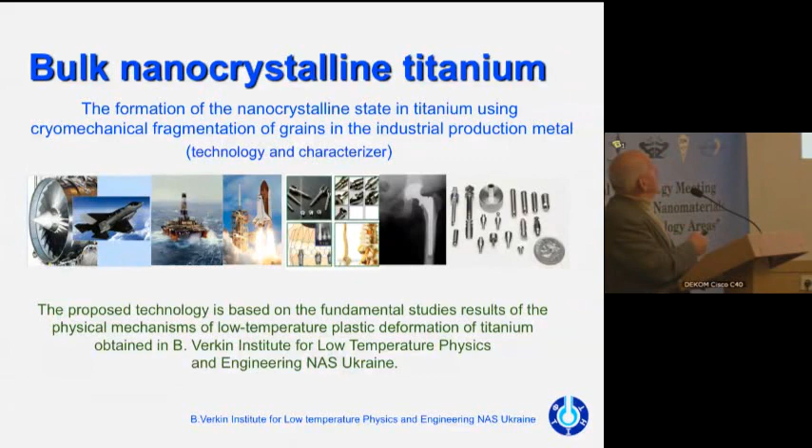The existing methods of obtaining nanocrystalline materials using plastic deformation have a number of disadvantages. I will later list the advantages of this particular method, but the technology itself is based on the results of fundamental studies of mechanisms of plastic deformation of titanium and titanium alloys, done for many years in the Physical Technical Institute of Low Temperatures named after Verkin at the National Academy of Sciences.

Down to 0.5 kelvins. The characteristics of titanium that are formed in the nanocrystalline state. The best thing here is creating the nanocrystalline state in titanium of the highest purity. Nowadays there is no method that could be applied for this type of refinement of titanium or zirconium, and 30 nanometers cannot be achieved still in the best labs over the world.

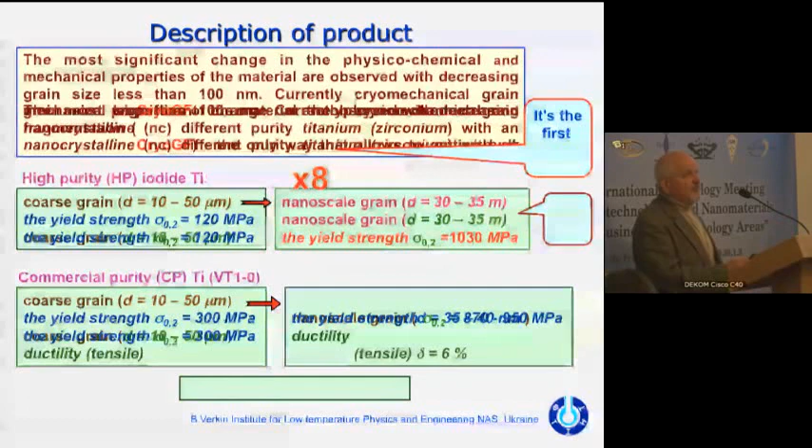But another thing, the flow threshold of titanium is increased 8-fold when the grain is reduced to 30 to 35 nanometers, from 120 megapascals to 1030 megapascals, with a ductility of 22%. For technically pure titanium, the strengthening process is additive, comprised of the additives present in the metal.

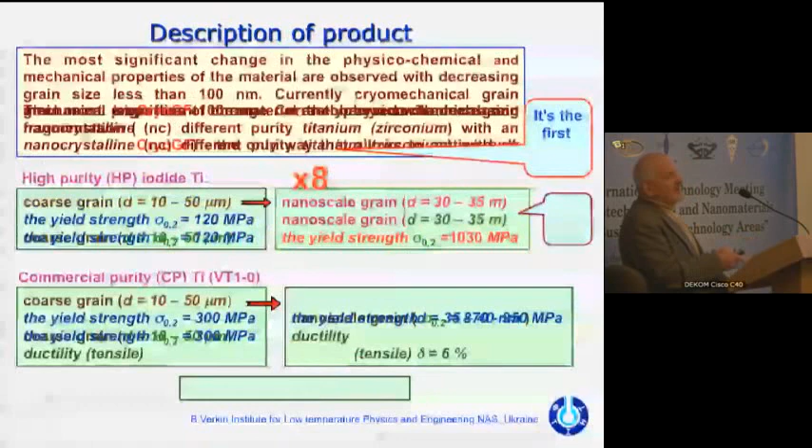What is it, nanoscale grain? To the right. The nanometers. Oh no, excuse me, this is a clear mistake here. No, yeah, my mistake. So 35 to 40 nanometers for technical titanium compared to titanium, 6 aluminium, 4 vanadium.

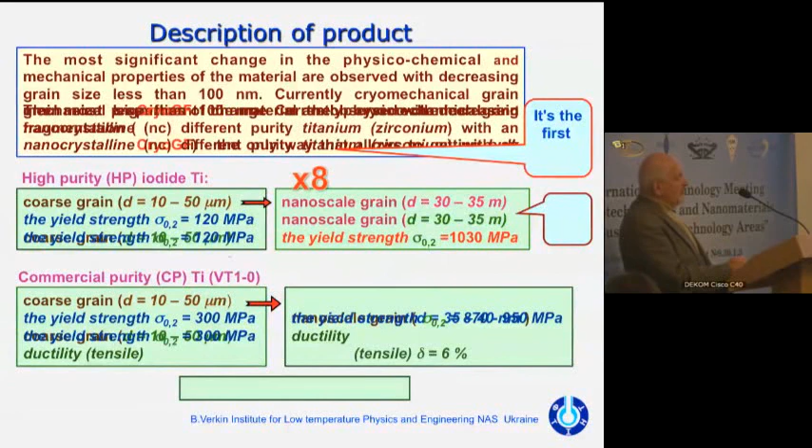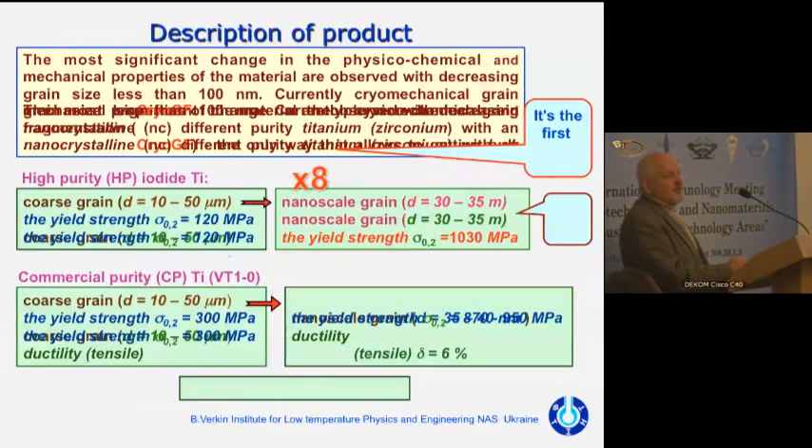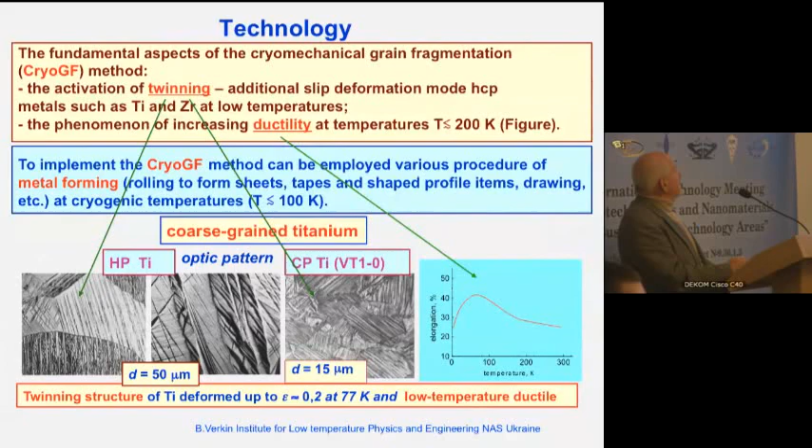The physical basis of these technologies and development. Titanium is twinning at lower temperatures. At the bottom we have optical structures for titanium, with an initial grain size of 15 microns. Every grain is fragmented by twinning. This is the very mechanism. With the increase of cryo deformation, the grain size decreases significantly. High purity titanium will have a grain size of 30 nanometers. Technical titanium has a larger grain size.

Materials used in various spheres, especially for medical implants, must have not only technical properties but functional. For technical properties, maybe 100 nanometers of grain size will suffice. But for physical chemical properties, corrosion resistance, biocompatibility, bioactivity, further refining is very important for functional properties.

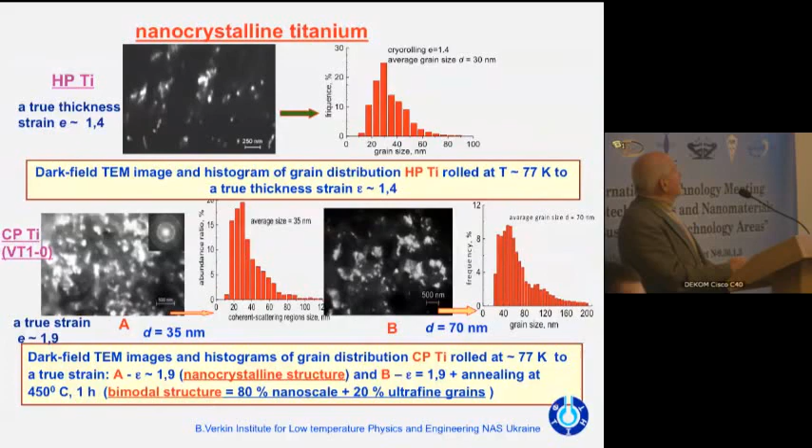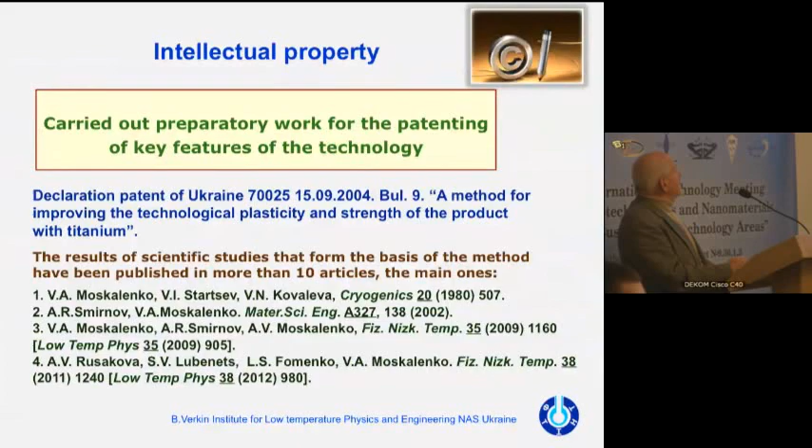But in order to break the threshold of plasticity while increasing hardness, we suggest a bimodal structure: a nanocrystalline matrix with a share of submicron size grains. We don't have the patents, there's only a declaration of patent. And these are the results and the participants in these studies.

And these are some of the advantages: the hardness, the fatigue strength, resistance to friction. Titanium has a very low friction resistance, and the studies are still ongoing. With the refining of particles, the wear resistance also changes.

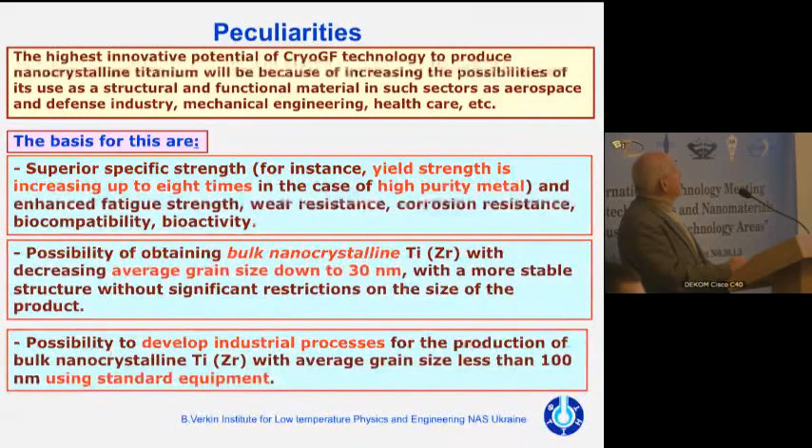Now, to conclude, the existing methods of alloy pressing only produce bigger grain sizes and smaller samples. Our technology allows applying the existing methods of metal treatment. All kinds of regularly applied metal treatment can be used. The Russian Institute in Ufa is the only organization that could produce a rod 8 meters long and 2 millimeters in diameter.

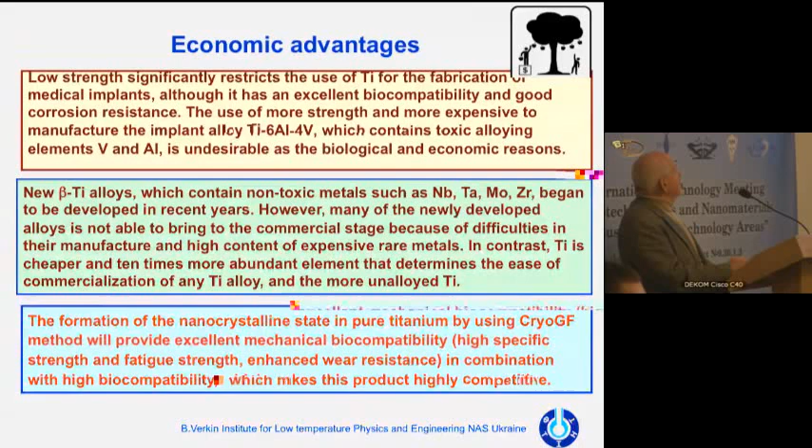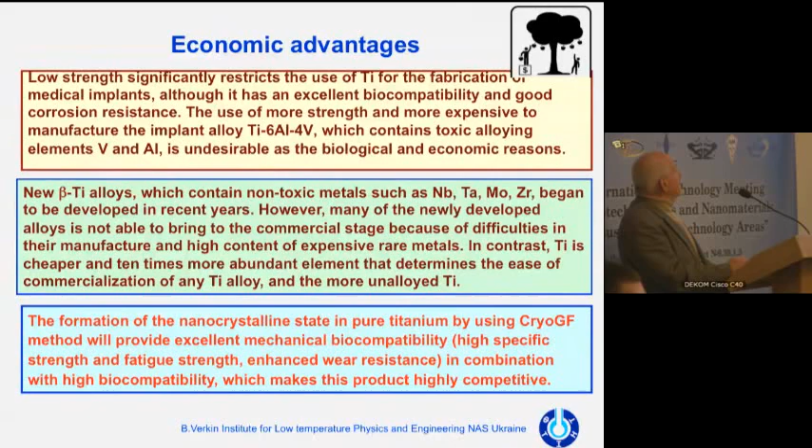Economically, it's hard to say, we don't know yet. We can only presume it is highly attractive. For investors, it is attractive because it is easily commercialized. For instance, liquid nitrogen as a coolant is easy to obtain in oxygen producing factories, and liquid nitrogen, used for cooling, can be used for making materials. The words are written here, but they offer a general overview.

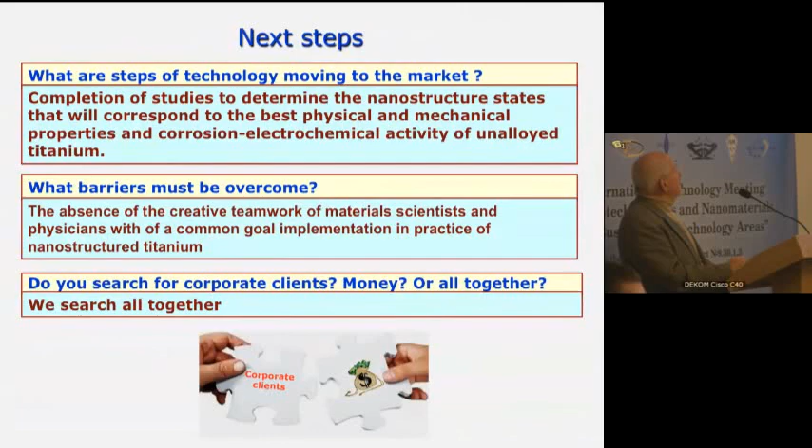As for the barriers that still have to be conquered for this technology to be successful, we need the joint effort of medical workers and scientists. Only by joining our efforts can we optimize biomedical properties and material science.